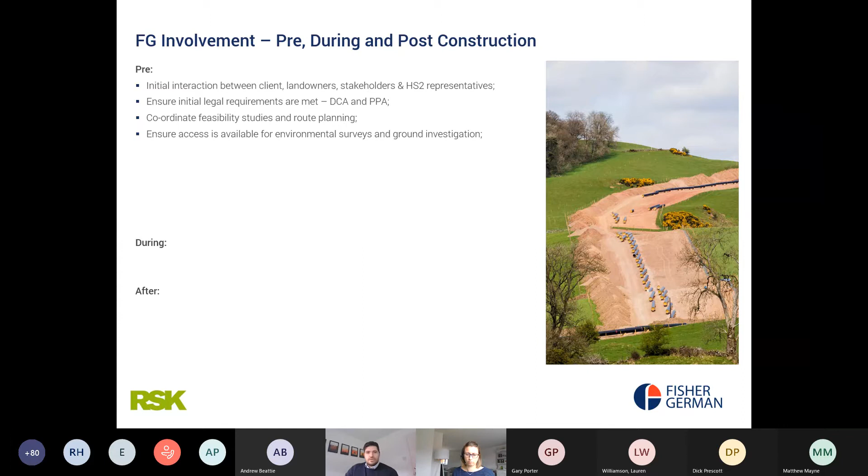Coordinating feasibility studies and route planning, like I said, that's super important at the beginning of any scheme. Ensure access is available for environmental surveys and ground investigation. So we'd serve the relevant notices on landowners through HS2.

Provide planning advice, services for AGIs. Like I said before, Schedule 17, that is kind of HS2's planning permission. So the hybrid bill grants what is termed as deemed planning permission, which is similar to an outline planning consent for development authorised by the bill. There's obviously a requirement to liaise with the local authority on that, but it's done through a HS2 internal procedure.

Undertakings and Assurances assessment, as I said before, can take quite a long time, but it's definitely worthwhile getting your head around those and understanding them to make sure you don't have any non-compliances.

Pre-condition surveys on site, getting a record of the land. Stakeholder and community engagement, and we also act as a consent manager up to the point of construction.

So we've been filling out the construction readiness checklist, which is actually a really useful document, and I've actually pinched it to use on other schemes because it's such a good thorough checklist to make sure you've covered every possible issue you might find, to make sure it's ticked off and you can take access to a site without any issues arising.

During construction, we'll always liaise with the contractor and any affected parties, and there's obviously ongoing interaction between the parties. Afterwards, we'll do a post condition survey.

We get involved in the FLAB process, which is the land process, making sure that new legal rights are in place before the land is handed back. That's kind of throughout the whole scheme, to be honest, rather than just after.

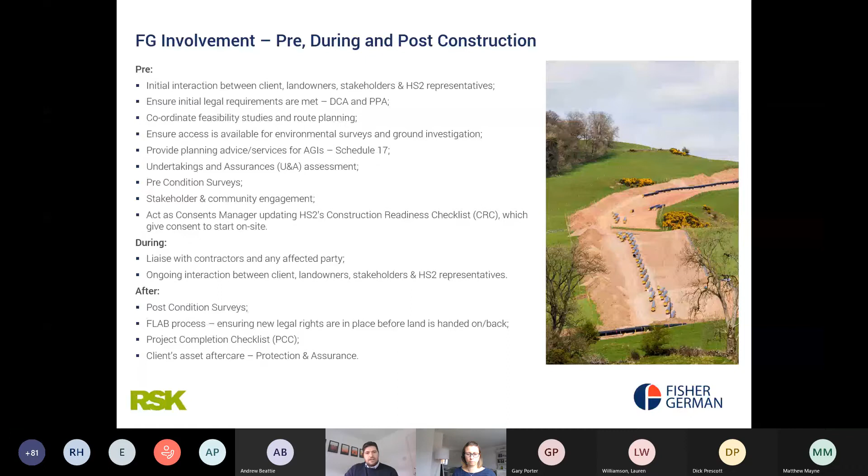Okay, so I'll hand that over to Andrew.

Thanks so much, Sam. I suppose you could just progress the slide a little bit. Okay. One more. There you go. Fantastic. Thanks for that. So thanks for that, Sam.

Sam has introduced the hybrid bill. Within the bill, there is reference to control measures known as the environmental minimum requirements, which is captured in what we can see on the screen, and the undertakings. So those of us who have worked on similar scale projects, such as Crossrail and other DCO schemes, may be familiar with this structure. I'm going to briefly explain the significance and development of these requirements.

Prior to the requirement for the hybrid bill being granted royal assent, an environmental statement was published. The environmental statement stated that to ensure the project's impacts, which had been assessed in the ES, have not been exceeded or would not be likely to cause a significant environmental impact, the nominated undertaker, including the utilities companies, are contractually bound to comply with the controls set out in the EMRs, designing and constructing phase 1 of High Speed 2 works.

The EMRs explain the expected minimum requirements. It also contains a series of memorandums, all of which are linked to the undertakings and assurances. Beneath those documents sit a whole raft of technical documents and e-papers, all of which are available on the HS2 website, but it requires some knowledge to identify what actually is required.

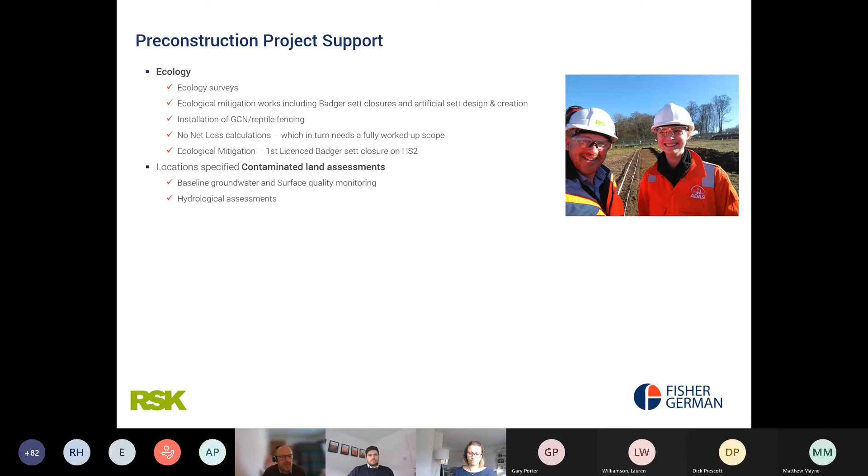Similar to the slide Sam had up earlier talking about pre, post, and construction support - this is what we were doing to get to the CRC checklist. Sam would be operating as project manager, and we'd work with him and the construction teams to get ready for this construction readiness checklist. Basically, this meets all the HS2 requirements, linking back to the environmental statement and environmental minimum requirements, but works will not exceed the impact assessed in the ES. Simply put, this means checking that you're working in the area you're supposed to, and working to the right requirements.

So through these links in terms of pre-construction, we were able to eliminate certain risks, hit key program dates, and support overall risk reduction of the scheme. All of the items identified on screen were delivered by the RSK group of companies in collaboration with construction contractors. We even utilised our own in-house archaeological team - you can see watching brief trial trenching on a work site with our archaeological team from ADAS. You can see all the other items we've undertaken there.

A couple I want to focus on here would be ecology - ecology surveys. These were undertaken as part of the environmental statement, published in 2013, but we didn't start on site until October 2017, so there's a huge gap between that period. We know ecological species move around and aren't constrained to one location, so we undertook surveys because previous ones had expired or were never undertaken in the first place. There was a lot of opposition to this, and landowners weren't permitting access to their sites, so at some points we were doing surveys no one had ever done before.

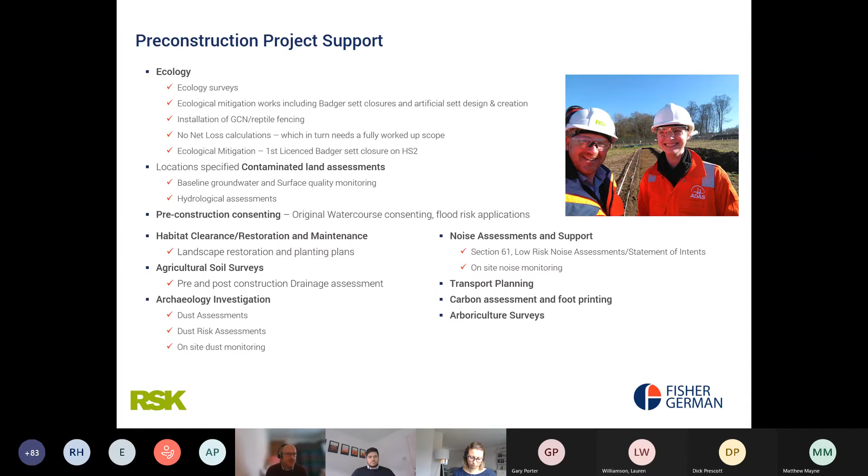When we were designing our fencing, we had to consider the wider scheme, because we didn't want to duplicate our effort. HS2 is publicly funded, so public money has been spent, and we didn't want to burn through that.

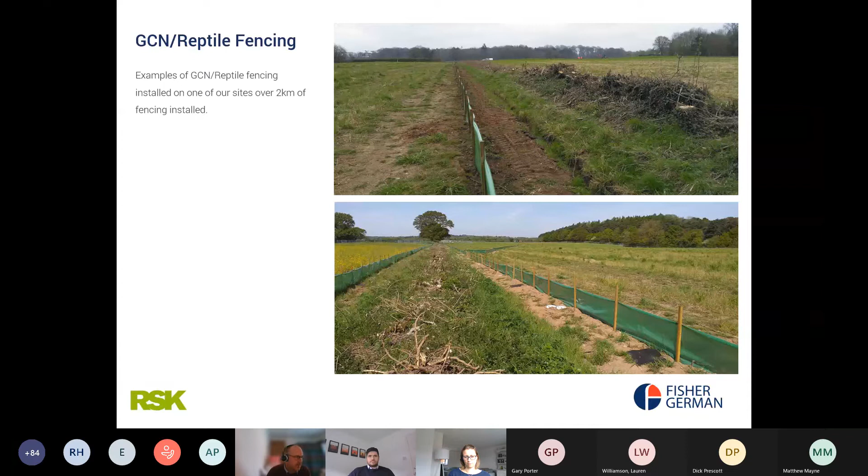Technically, as the landowners had already been compensated for the loss of crops, they weren't too bothered about what happened. So this became our issue, and we had to undertake large-scale land clearance. If we'd left that to rot in the fields, it would become a habitat feature for the species we were trying to exclude. So it's about maintenance, and thinking of something else we weren't particularly prepared for at the initial stage of our work scheme.

And then just moving on to the next one.

Going through that checklist, we've been given approval to commence on site. So we have commenced on site, and moved into the construction phase.

The role of the environmental manager during that phase can be fairly broad. It would be pointless to undertake all the work up front without reviewing how this was progressing during the construction process. So the environmental manager's role could change radically, coming to more awareness raising and training, compliance monitoring, incident response, coordination, stakeholder management, and general problem solving.

And this is something that always happens to the environment team - it always picks up the too-difficult-to-manage activities. That could include, as we're going to talk about on this slide, responsible sourcing of materials and non-road mobile machinery.

With the EMRs, there is a requirement to ensure that certain products are responsibly sourced. Sam mentioned that if you take the total amount of concrete to be used on the project, it would cover the size of Manchester. So you have to consider the embodied CO2 emissions with that, not to mention the energy requirements to manufacture the product in the first place.

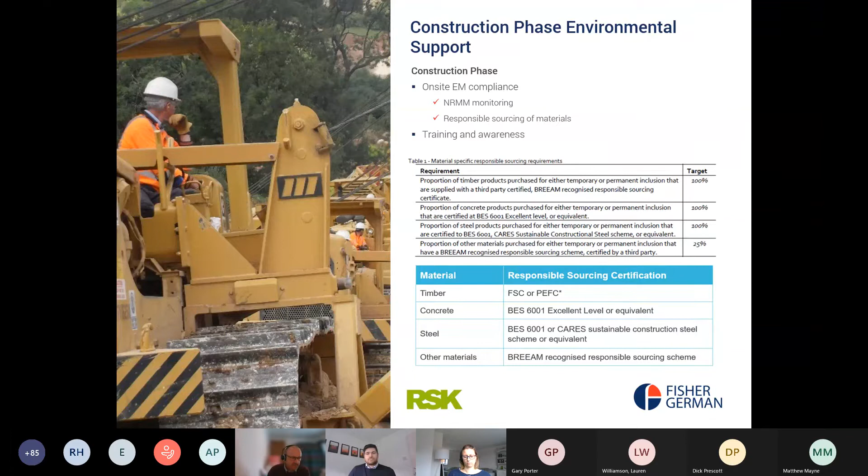The next slide is again something you wouldn't typically think an environmental manager would have to deal with, but it's about non-road mobile machinery. Non-road mobile machinery is defined as any mobile machine or vehicle not solely intended for carrying passengers or goods on the road - for example, an excavator, dumpers, or piling rigs.

It could be generators, concrete pumps - everything you'd expect to see on a construction site has to have a minimum standard in terms of Euro rating. There are key exclusions, so items below 37 kilowatts are exempt. And you have to remember that generators are constant-speed, so they can only go up to stage 3A, because there's no corresponding level of stage 4 in EU levels.

The one thing I wanted to impart today is this is hot off the press - this came from HS2 a couple of days ago. That middle column shows block exemptions. Previously, if you look back into the EMRs, from the 1st of January 2020 all the emission standards would have moved up to what you see in the 2022 column. However, HS2 have taken independent advice from the Energy Saving Trust, and based on that, they've extended the block exemption, meaning the stricter requirements come into force on the 1st of January 2022 rather than this year, to give the construction industry more opportunity to prepare. So you can apply.

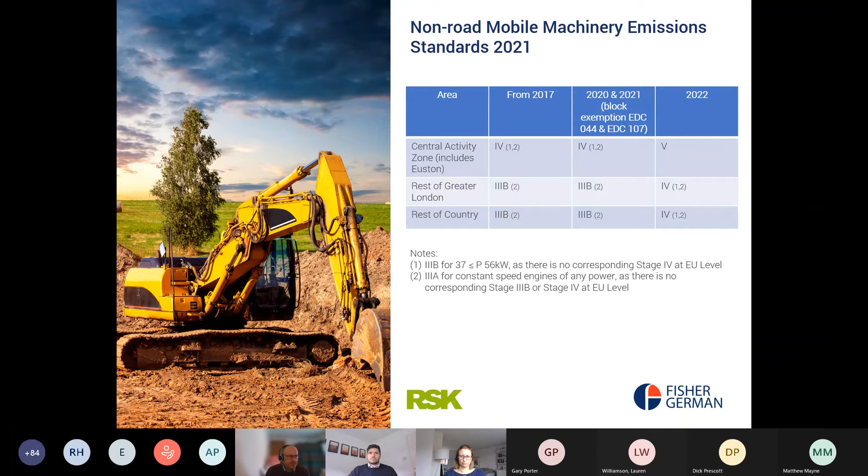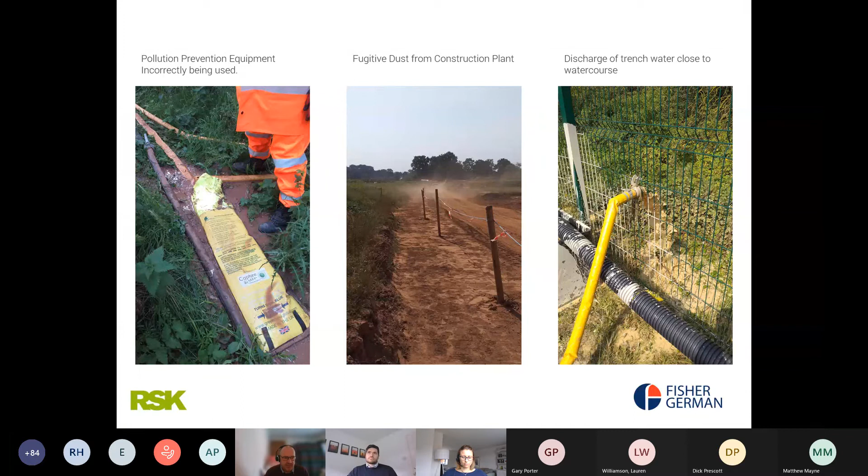In addition to becoming experts in non-road mobile machinery and responsibly sourcing materials, sadly, even with proper planning and briefing out to our staff, incidents occur, and this is why you need a competent environmental manager on site. These are items from across the whole construction industry and infrastructure projects to work on: pollution prevention equipment being incorrectly used, fugitive dust from construction plant, and probably the worst one, discharge of trench water close to watercourses. This isn't permitted or best practice, and that's what you'd have an environmental manager on site to inspect and enforce.

Taking that a bit further, on-road vehicle emissions - in addition to the non-road NRMM requirements, the EMRs apply to light and heavy duty vehicles. The first EU emission regulations were introduced in around the early 1990s, called Euro 1. Since then there's been a series of Euro emission standards, with the current Euro 6 being the highest standard for diesel, introduced in 2014. These standards are designed to become tighter over time to define the tolerable limits for exhaust emissions of new vehicles.

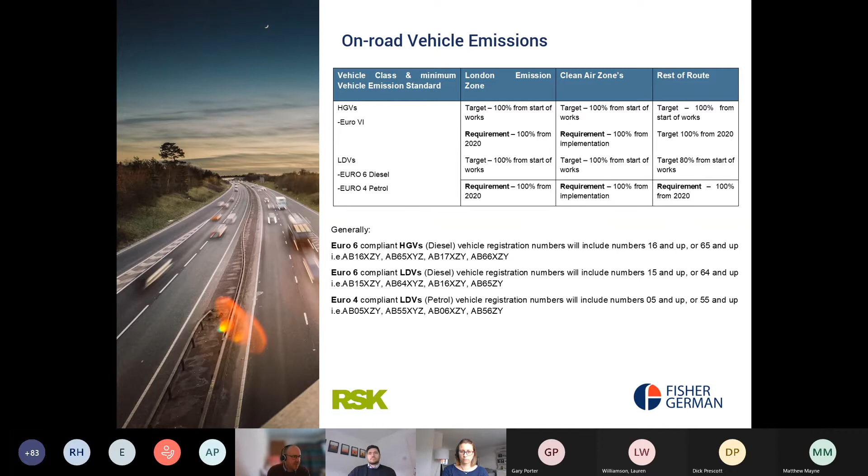You'll be pleased to hear we've got to the end of the construction project. Your asset is now installed in the ground or in the air, it's now live, but the role of the consents manager and environmental manager doesn't stop there. There's another checklist to consider - the project completion checklist or closure checklist. Within there, you may have to demonstrate actual CO2 emissions from your work site, demonstrate compliance with responsible sourcing, give ecological license returns, and undertake physical restoration, which you can see on this work site - we've got coir matting put down with hydro seeding on the banks, you can see it all in green. That really comes to the end of our role and involvement on the project.

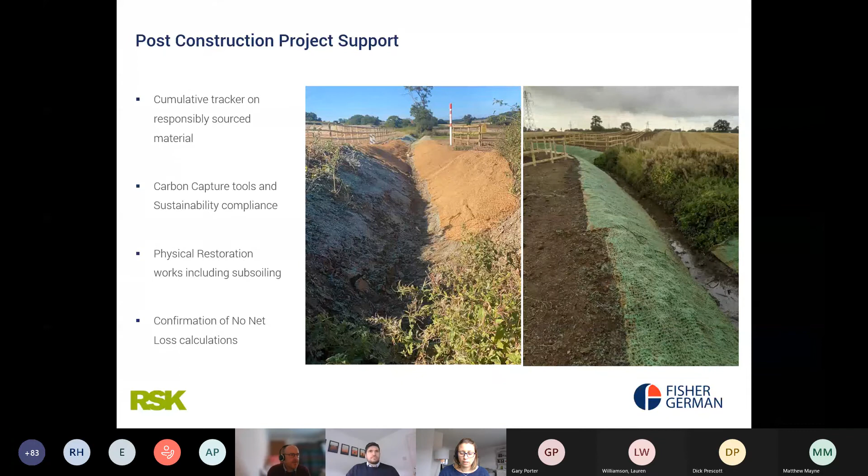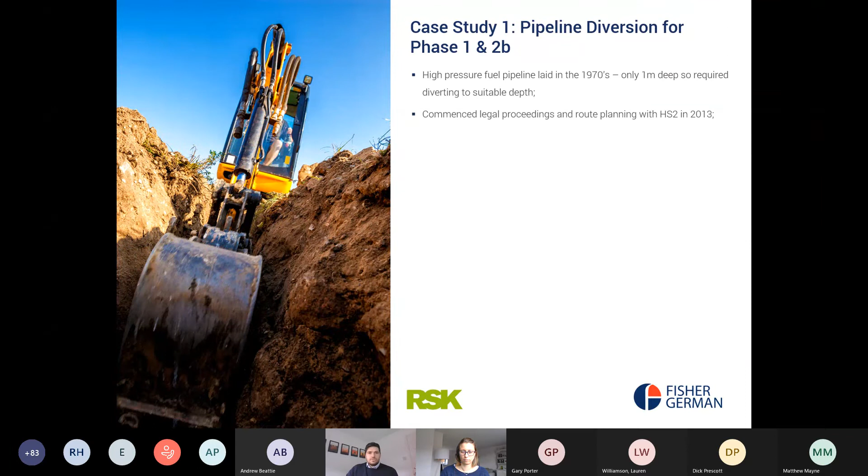The pipeline diversion for both phase 1 and phase 2B, where the two lines split, not too far away in the Midlands. This was a high pressure fuel line laid in the 1970s, only at 1 metre deep, so we had to divert it to a suitable depth, with HS2 doing cut-ins through a lot of the install. They want the assets quite deep. So for the project, we commenced legal proceedings and route planning back in 2013.

That's when HS2 got in contact first of all. The constraints on the site included badger setts, which caused a bit of a headache. There was a 600 metre horizontal directional drill, reaching a depth in the bedrock of about 30 metres. We also had to cross under the Birmingham and Fazeley Canal and under the M42 with that drill. There was also a large gas pipeline across the site, which caused a bit of an issue, but I managed to overcome that quite well. Then there were challenging landowners - they weren't too bad on this scheme, but certainly some challenges along the way.

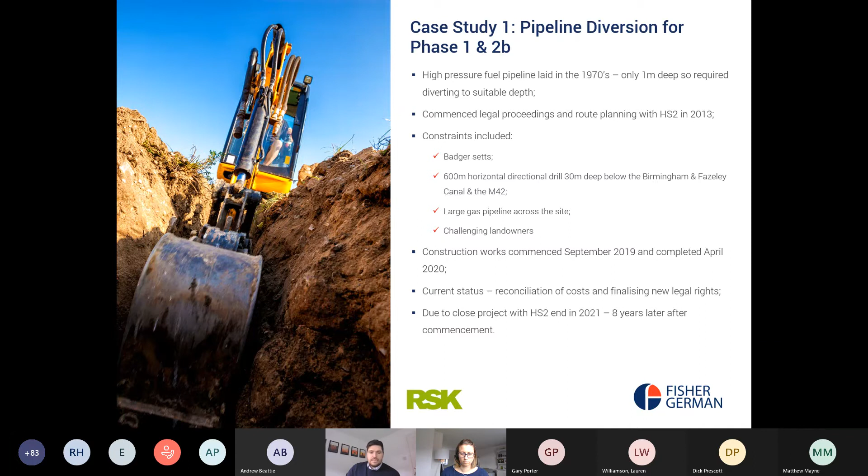Construction works commenced September 2019 and were completed April 2020. Current status is that I'm going through reconciliation of the costs, closing out the work orders with HS2, and also finalising the new legal rights. We're trying to get those done as quickly as possible. HS2 are at a stage now with this scheme where they want to get them negotiated and agreed, or whether to compulsory acquire the rights. Hopefully the project will be closed off this year - we'll come to an end with HS2 on this project, and it's actually 8 years after we commenced discussions with HS2. It's been a long road for the project, but it's been pretty successful.

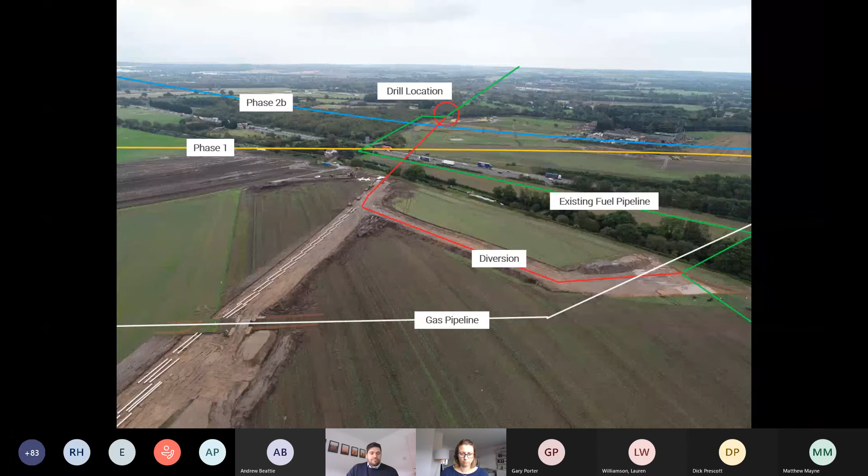As part of the scheme, we had to do a planning condition under Schedule 17. So we teamed up with an engineering firm who put together a virtual reality video for us so we could demonstrate to the planners, the local authority, and everyone internally at HS2 what we were planning to do.

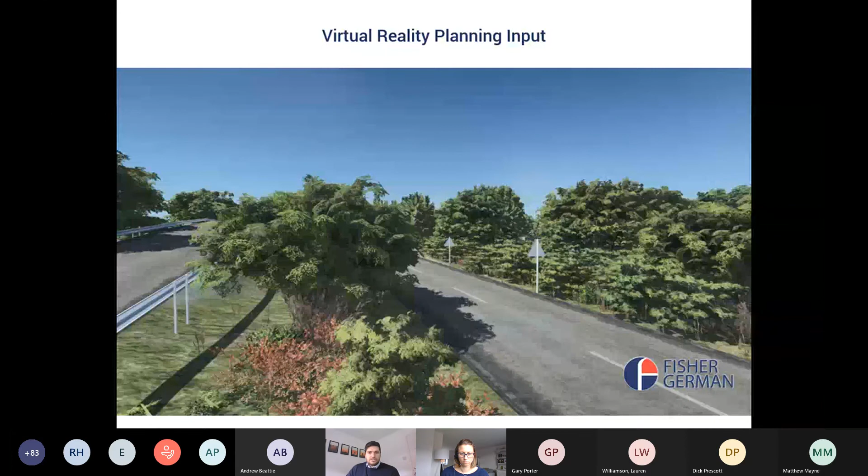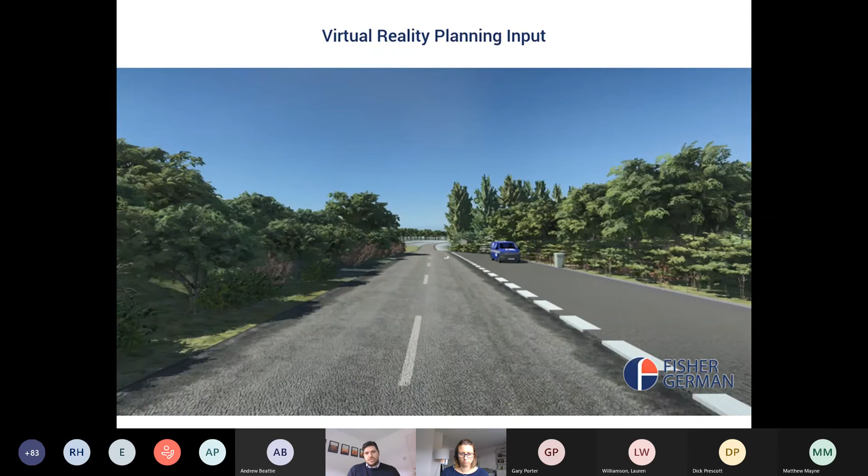At each end of the pipeline we had to put a valve compound. We worked with this engineering firm who produced this kind of fly-through, which accompanied the planning consent internally at HS2, showing what the development we proposed would be - the access track flying through to the valve compound. It gave the planning authority a good vision of what the proposal would look like, and how it would be sheltered by existing trees and shrubs, which are shown as they are on the ground.

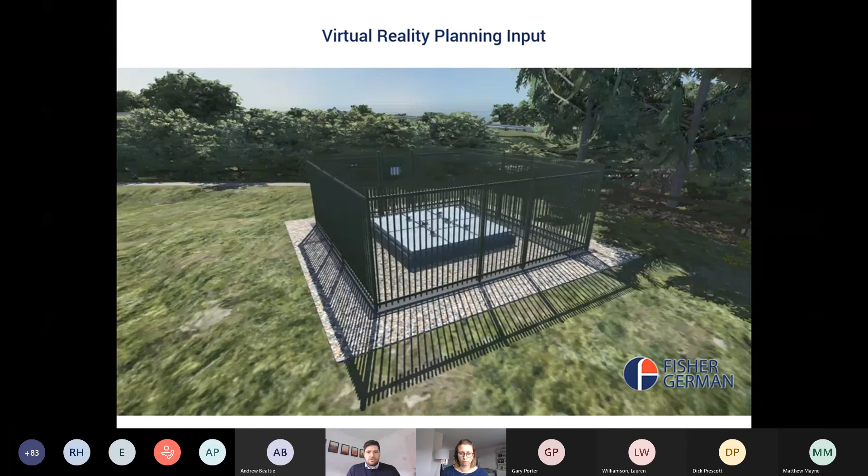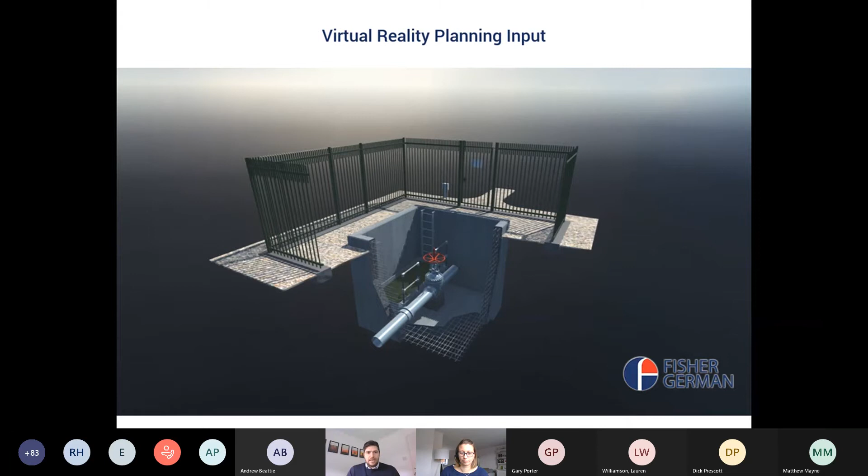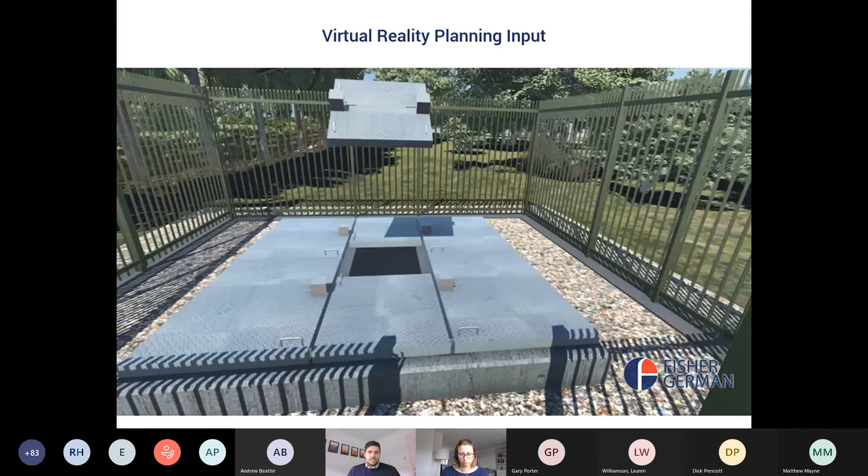As any engineer would want to do, they got involved and did some cutouts to show the pipeline, how it ran through, the lids on top, generally giving a good feel for what we had planned for the job. From a planning aspect it worked really well. They also did a kind of walkthrough, and used this for training purposes for pipeline technicians, teaching them in the classroom how the doors work, what it looks like inside the chamber, and how they can safely access and exit it.

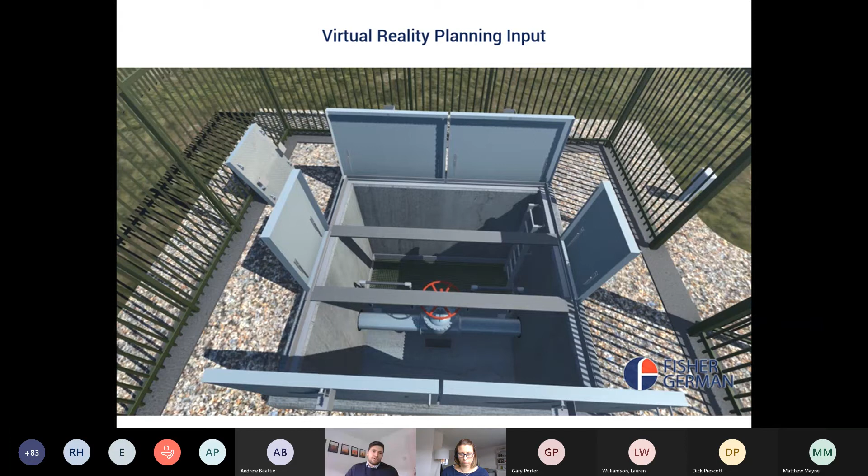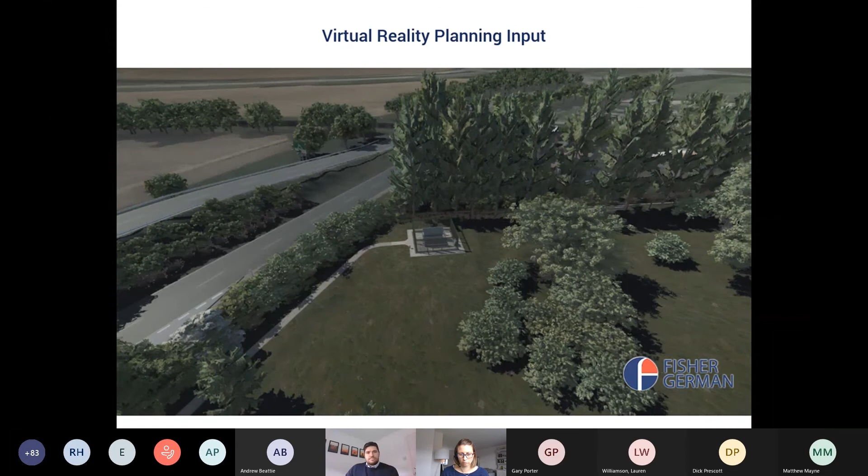Yeah, and it's been a really useful demo to train the new line techs up. They can even take photographs on site and import them into these videos, so they can get the wiring and all sorts of things within cabinets to look exactly like it is on site for training purposes. Thought I'd show you that because it was a really useful tool. If anyone's interested, just give me a shout and I'm happy to team you up with the guys that created that.

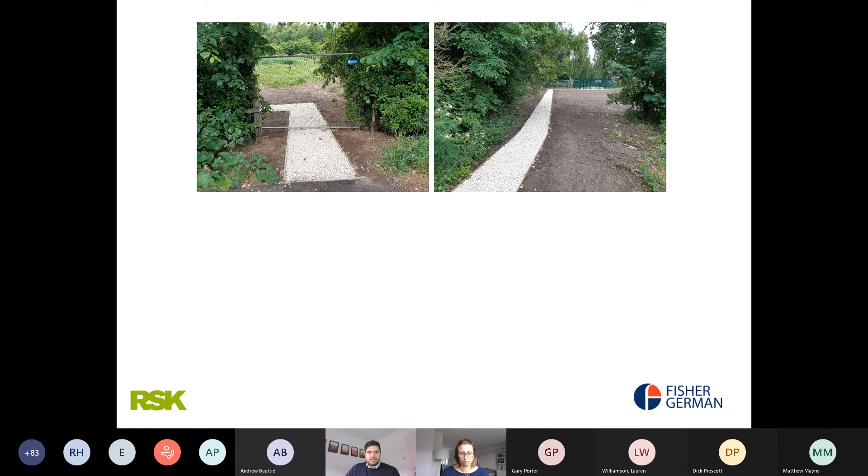Okay, so a few as-built photos, that's as it looks, so it's not too far off. In the video you saw a tree on the right hand side, that's that one there. And then the valve compound as it looked once it was built, so it wasn't really far off. The planners were happy, and it's definitely a tool we'll be using in future when we're getting planning consent for these kinds of things.

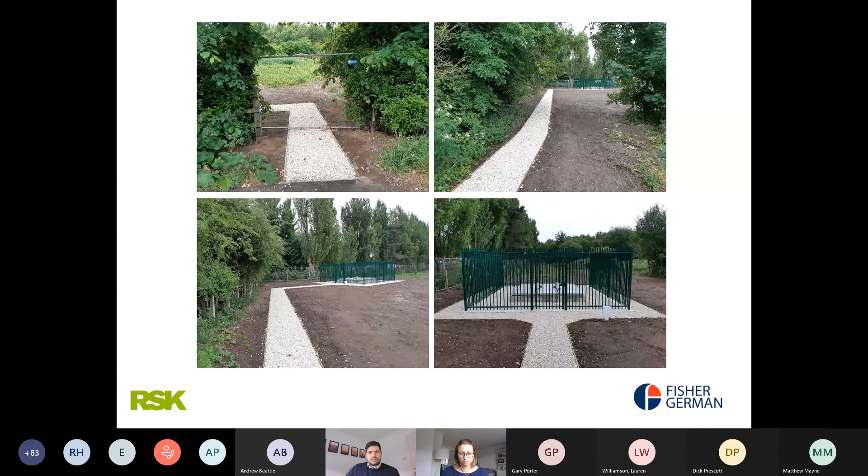Okay, so lessons learned. At the end of the scheme, my lesson learned was I think it's absolutely vital for clients to instruct an experienced team who have previously dealt with projects with HS2. They're pretty much a beast of their own, with their own acronyms, terms and processes. It's vital you get the right people on board to begin with who understand all that, because if you don't, it's a big learning curve and can cause big delays, issues and additional costs. Like I said, ensure detailed feasibility is completed.

We had quite a few feasibilities done on some projects with solely engineering input, which is fine, but in today's world, I think the land, environment and planning elements have huge implications on projects. So it's definitely worthwhile teaming up the right specialisms to get that feasibility study done nice and early in the scheme.

Spend time reviewing the U&As, as non-compliance can be quite time consuming and costly to rectify. Andrew added that one, which was to ensure that responsible sourcing and NRMM requirements are embedded and clearly identified within contractors' and designers' contracts. If you miss them out, Andrew will agree, it's a bit of a headache for people that don't quite understand that process. And there's a commercial risk to it as well.